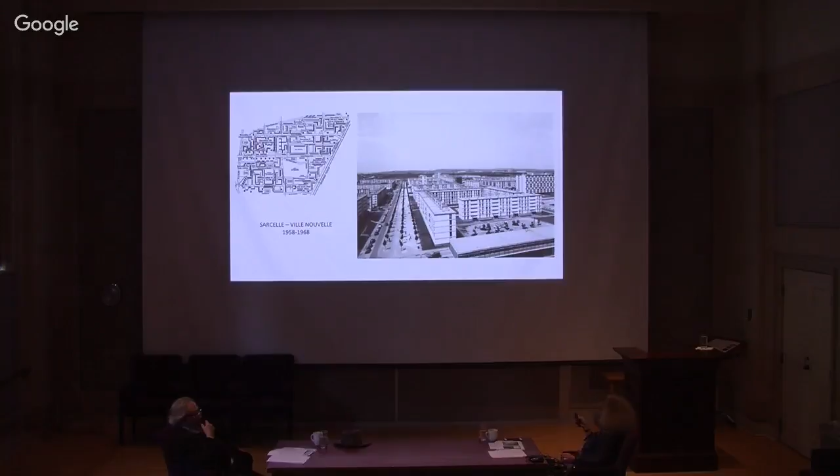At the beginning it was slowly like that, and today it's a bit worse. This type of city has slowly begun to stigmatize people because in the unit they repeat the same unit all the time.

That's what we call in this drawing the dolly architecture, which is a repetition of the same model. People cannot identify themselves anymore in the city or in the place where they are living. You see the repetition here, it's near Paris.

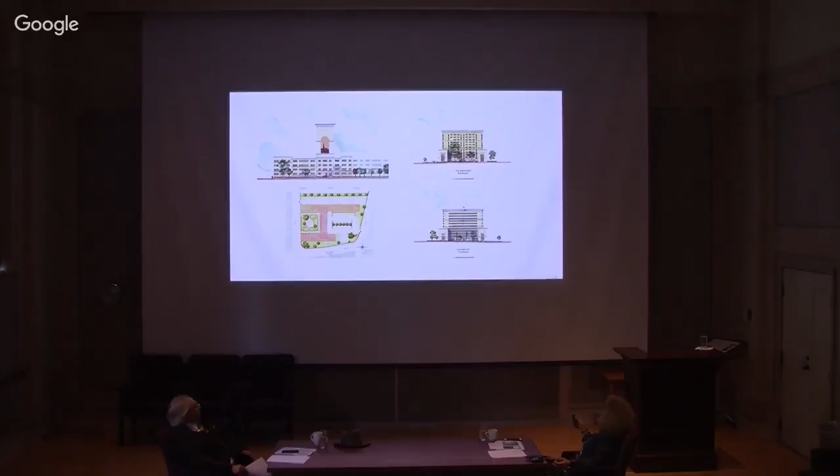So we make sequences, isolate it by putting isolation on the facade, and then we coat them. We try to give a new rhythm and sequences to the bar, which was uniform before, and treat the gable end of this tower with a painting, putting sequences in the rebuild.

So the same building after our renewing. With coating, we put elements on the facade to bring it back to humanity, with the scale of men. So we make a composition with a basement, then a cornice, and an attic.

All is coated, the windows are changed, and we change the color of the different sequences so it looks like a street again. And the elements like this cornice, here is an underbossage, then a new cornice, and the big one at the attic. All the outside space is now private, with fences and gardens.

The people, this is social housing, didn't recognize their own habitation when they came back because they were inside during the work, but with the scaffolding they didn't see anything. So when we finished the work, they couldn't believe it was their own habitation.

Another solution is a mix of renewing bars and making new construction inside and extension. In Alençon, it's in Normandy. This is a district where very poor people are staying, it's social housing of course, and our project was partly to renew the bars and partly to build a new part of the city.

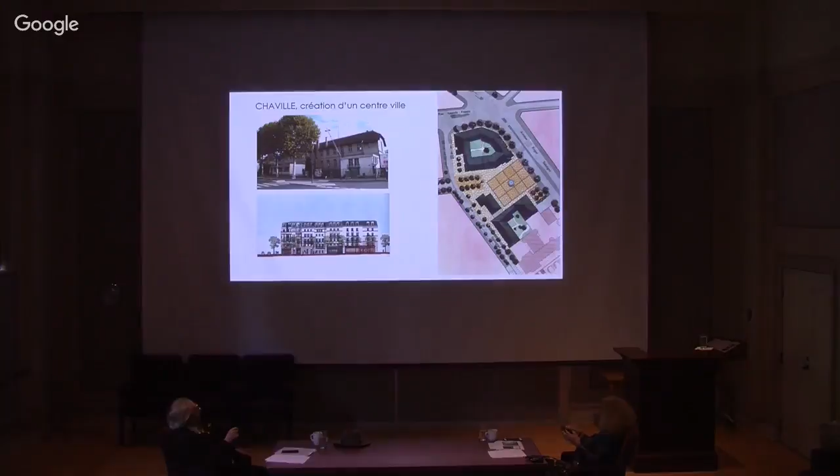We redraw, and partly it's half and half social housing and private housing, always with a mixity of function. So now it's the place instead of the school that was there, with the market here, and offices.

There are private housing here, there is social housing, everything is mixed. And the life now in Chaville - they have their own center of the city, a place to meet, to have markets, open markets, and fiestas.

There is another view of the market, and the treatment of the architecture is always inclusive. Even the private housing is for people who are just moving out of social housing, not for rich people. It's for the middle class when it's private housing.

So we have no big budget to build, and that's why we have to use coating more than stone - we cannot afford stone, it's too expensive. And we work on all those modern, different elements, which are in very light materials.

And we read through with those big arcades. Here is the market, and here are the offices. When it's private housing, also we have balconies and outside spaces, treated like a new room but outside - not a balcony where everybody can see you, but a closed loggia like that, which becomes an element of the facade. This is another view of Chaville with social housing.

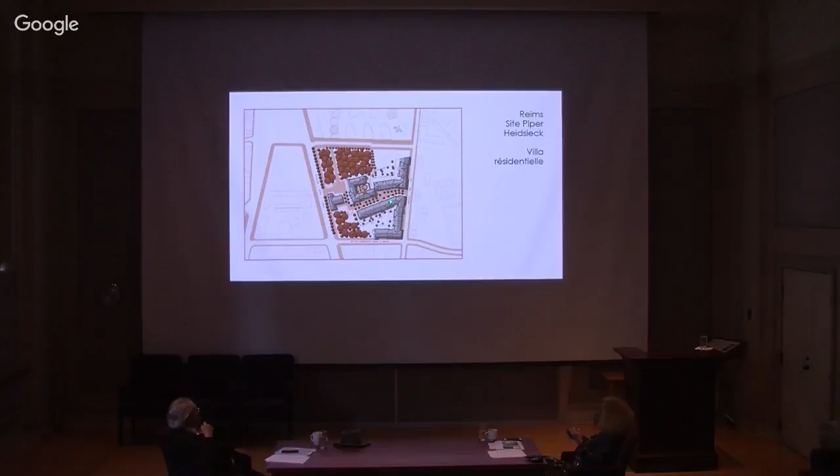We propose a street in the spirit of a villa in Paris, like a private street, not a street where you go in with cars. With the Rue des Coutures, it's the whole block like that - you can come in here and go out here. This is the entry of the villa, so it's a private street, and all those here.

Mostly it was not social housing, it was private, but always with a public space, always a place to meet and a place to have a link between people staying in those residences. And it was always planted.

So this is part of a building in front of the boulevard, like the entry or the signal of the quartier, with all those loggias and balconies, always the same composition of the facade, with the bossage and the soubassement here, then the main part and the attic, with different things.

The most important project we had around Paris was the reconstruction of Le Plessis-Robinson. It was one of the first projects, the Quartier du Bois des Vallées, which appears here. It was occupied by blocks which housed a school, a provisional high school. They had to move into the new building, and the block became free for reconstruction. This project, about 600 apartments, starts with the first street, which was the first street rebuilt after the Second World War in Plessis-Robinson.

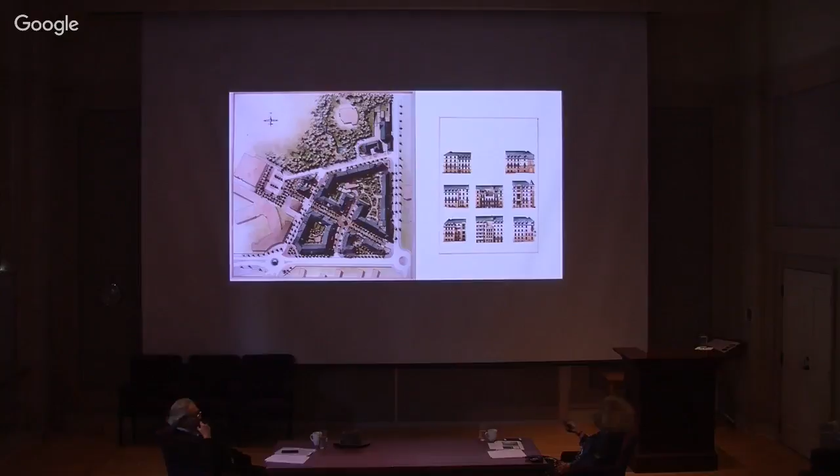The mayor changed, the political administration changed in 1989, and the new mayor, the president of the city hall, decided to change the image of the city. It was only bars and a dormitory city around Paris, and he wanted to make it more mixed with function and architecture. This block took about 10 years to finish, with a different developer, but we made all the architecture. This is an equipment for people with mental illness, and here it's all mixed. We had our first big award for this project, for the mixity between social and private housing, given by the Séminaire de l'Art Urbain, linked to the Ministry of Housing.

So you see, that's the new district instead of the barracks of the high school before. Here was the equipment for mental disease care. There was a main pedestrian way here, and here cars were going. Part of this housing was for les gendarmes, not the policemen, but the gendarmes, and this is social housing.

Ça, c'est le quartier du Bois des Vallées. This was one of the first. So you see the street — this is the first street, la rue du Bois des Vallées, and this is the second street built. This is all social housing; this one is more private with a different balcony. Every single building has its own identity — one has loggias, another has a loggia on the backside, here you have a fronton — but you always have sequences and the feeling of the street. It's not uniform; each one can say, if you come home, it's the one with the red door, with the fronton, or you have character elements to identify your own house.

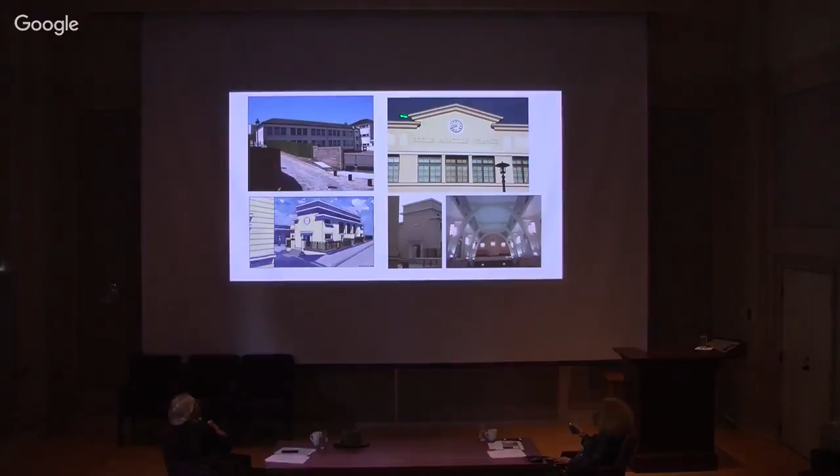This is the old part we keep, and the new part is there. So the Préau, which is the central place of the school, this is the part from the 30s. This is the new part, and we make the connection of the two places with this glass roof.

And on the street, it's the element like that for the new school.

And the third phase for the Plessis-Robinson, because it's a different phase, so the Bois des Vallées, then the center of the city, the cœur de ville, and then the Cité Jardin, which is more residential with garden and a huge landscape project. And here is the Résidence Palladio we have done with all those loggia, and it's in the new district, in the new part, which is developing now in Plessis-Robinson.

That's another project also with commercial. It's the high part of the city, and with mixity also of housing and activities.

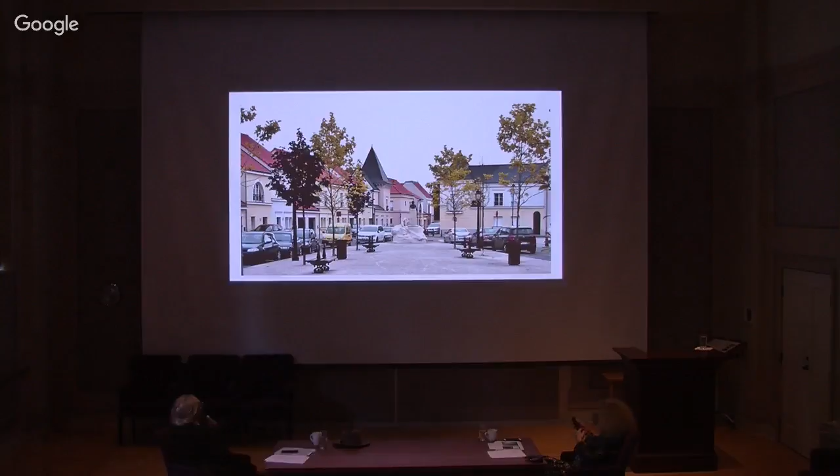So that's for Courrières. This sculpture was before along a street; we put it on the main place here with the bench and the equipment. It's a sports hall, so people have activities there too, and the marketplace. All these streets are quite new, and all the houses are different, always with the bricks.

In Blendecques, also in the north of France, it's near a church and the city hall, and they needed more space. So we made a place that's more preserved, with an arch to go in. Because the street passes in front of this arch, you go in like a private street, which helps keep the preservation of the site, which was very historic.

Here you see all those houses, always individual houses for one family. Here we have two or three houses in the axis and composition, always with a lot of detail in coating, because coating is a very poor material. If you don't work with it—making a bossage, or a detail like pas de moineau, which is a very traditional North detail—you cannot give this atmosphere of richness to the popular architecture.

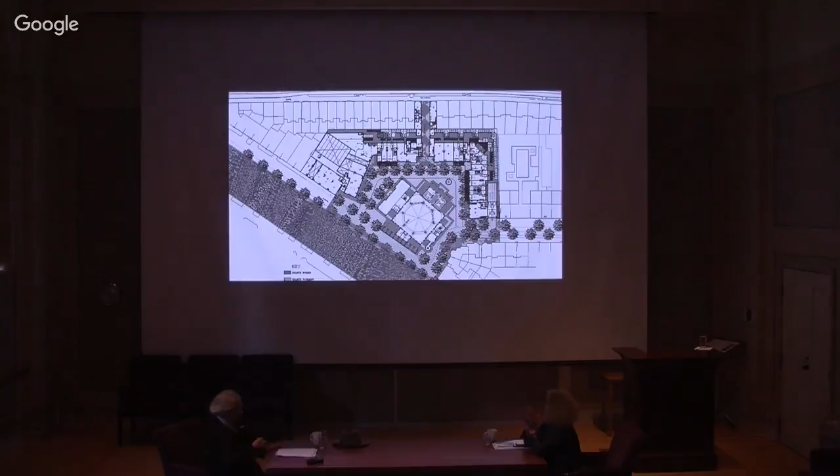Here you see one of the models we have done, and you can understand that there is a very strong relationship between the city and the building. For example, this is on the axis of the street. This follows a river. The mosque is oriented towards the east, and the housing is inspired by classicism architecture, which is not the style of the area.

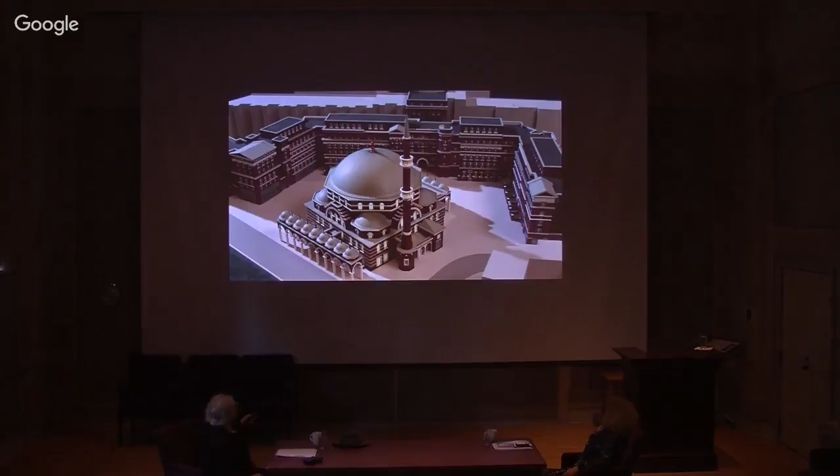This is the type of architecture in this part, which is 1930s architecture. I do not defend this, but when you are in an area like this, where people have lived, where their parents lived, where the children have been in school, you cannot say you are living in a horrible city and I'm going to destroy everything. That's not possible. And if you look at it with attention, you will see it is not so badly composed. It's not our style, but it's not badly composed. So we also have to answer to this if we want to be integrated.

So you could ask me what is the rapport between classical and this. When we are in contact in this project with this architecture, we use more or less the same vocabulary. We make a stop and begin another story, because all the projects we have done since the beginning, as Nada will show you, are an answer to one problem, which is the problem we are in front of now. But we also want the project to open a new story, that it is not closed when we have finished our project. With our project, you can follow another story.

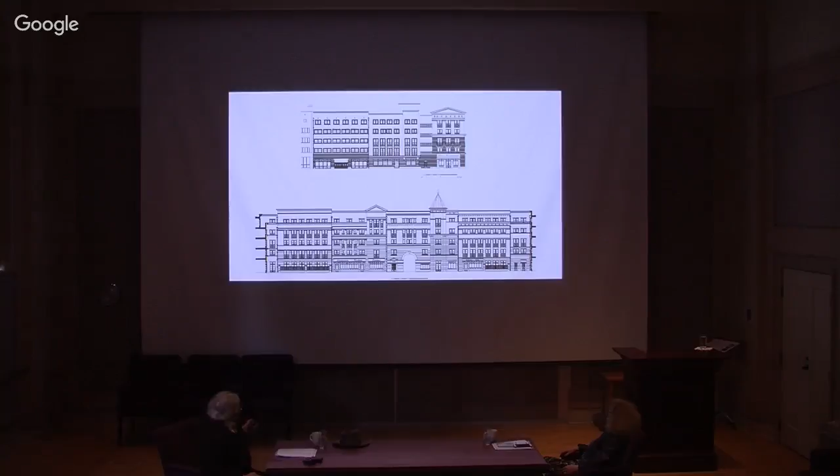This is not real, it is without the mosque. Here you see it with the mosque, you see the passage there. And on your left, the existing houses, and the project we have done to make the passage. So we use the vocabulary of the 30s to make continuity on the street, because continuity is more important. That's the reason.

So I'm quite proud of this architecture because, well, we use another language. It's like we speak good English during a few seconds. For the rest, the color and detailing are inspired from the Amsterdam school architecture, I would say.

You have to think that this is social housing. So it's very unusual to see that, even for the Dutch people. Dutch people were quite against the project. We had a lot of criticism, and we were not very much loved. We love to be loved, but it was not the case.

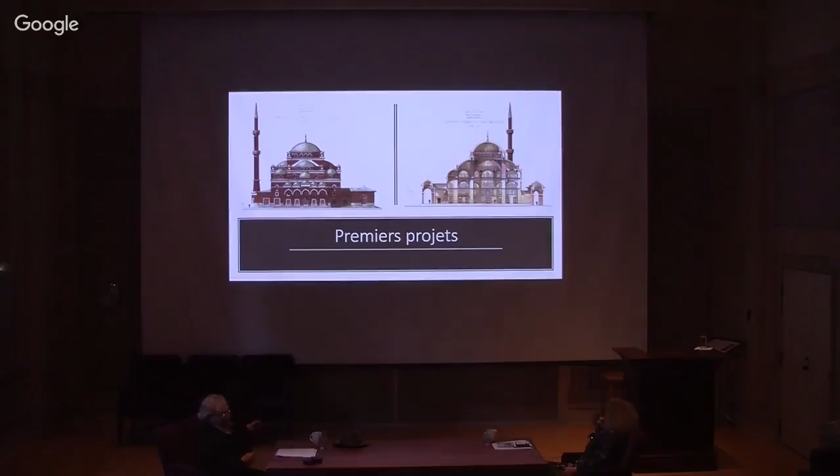So this is the construction of the buildings. And for the mosque we have done, Nada wants me to present this little drawing. That was the first drawing we did for the mosque at the beginning, for the first meeting. We came with a little watercolor. And next we proposed many variants. We understood that the Turkish wanted a Turkish mosque, and that is the mosque that has been built.

You see the detailing of the roof. If we take this off, you don't see the cupola.

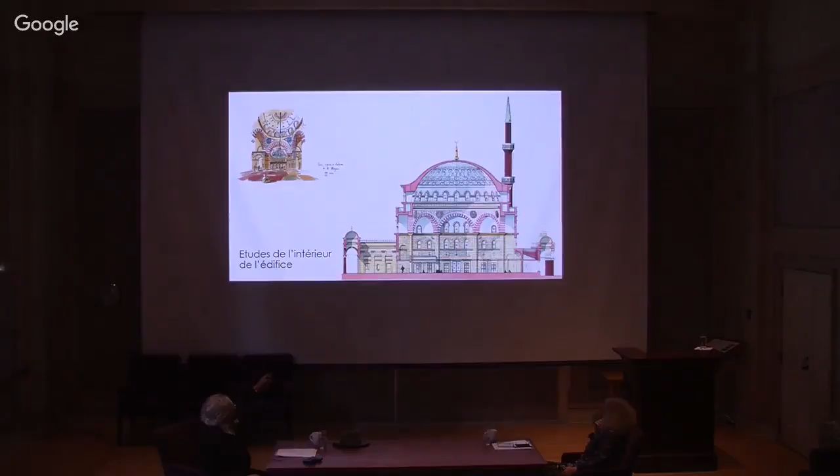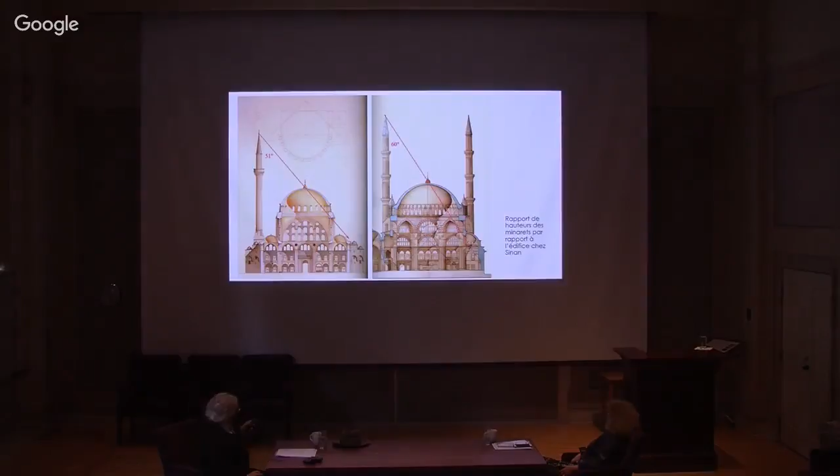So if you have a problem, you explain it with numbers, technically. Integrated inside the city, you see - oh, sorry. This is existing buildings, and here our project begins. So we gave priority to the historical buildings that were there, and then we transitioned to be classical. But as you see, it's a mosque - the typology of a mosque in a European city is something particular. But at the end, the fact that it is on the line, that it respects the volumetry of the city, there is a square, etc., integrates it into the city.

This is a real photo - now we don't know if it's real or this is a cupola under construction. But as you see, you don't really feel the cupola. If you're inside, you see the windows - those windows give the impression of a vault, but you don't really feel the cupola.